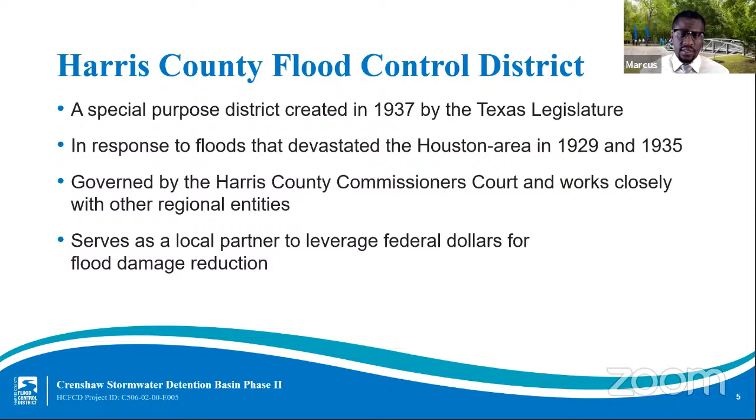The mission of the Harris County Flood Control District is to provide flood damage reduction projects that work with appropriate regard for community and natural values. One of the most difficult challenges we face is constructing effective projects that are sensitive to community and natural values in a highly urbanized area.

Harris County includes 22 main watersheds, totaling approximately 1,800 square miles and more than 2,500 linear miles of channel. 2,500 miles is approximately the distance from New York to California. A watershed is a geographical region of land that drains to a common channel or outlet. Each watershed has its own unique characteristics and needs. The project we're presenting tonight is in the Sims Bayou watershed, located in southern Harris County.

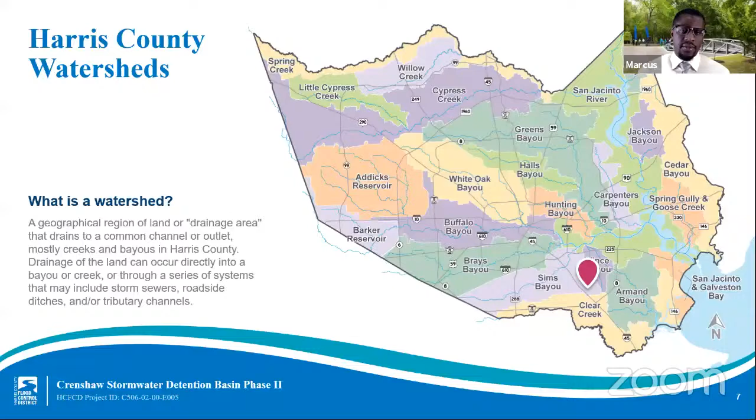Our area is flood prone, and here are some reasons why. We experience extreme rainfall, including tropical storms and hurricanes. We have flat, slow draining land, and we also have clay soils that do not soak up excess rainfall quickly.

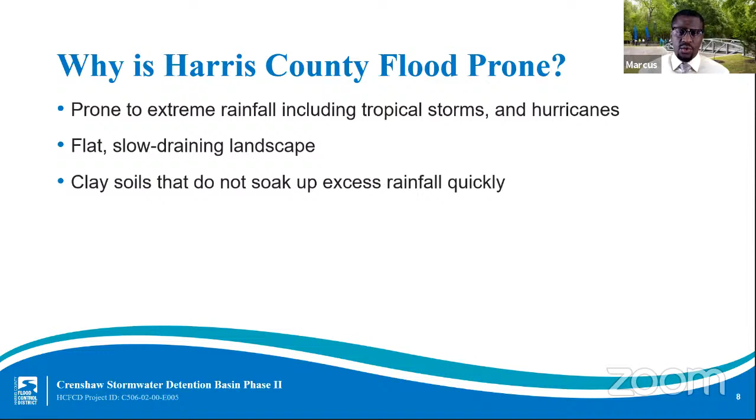While the Flood Control District plays a critical role in flood risk reduction, we are one of several entities involved in these efforts in our region. When rain falls on your roof, it flows through several jurisdictions such as streets and drains managed by Harris County Engineering Department, a municipal utility district, or cities such as the City of Houston, before it flows into a larger channel, creek, or bayou that the Flood Control District owns or maintains.

When storm sewers are increased, this creates an increase in runoff. Since it is our policy to avoid impacts to property downstream, detention basins have to safely take in and temporarily store excess stormwater during heavy rain events. Often, we partner with Harris County precincts, utility districts, and others to add recreational amenities such as trails to these basins and along our channels.

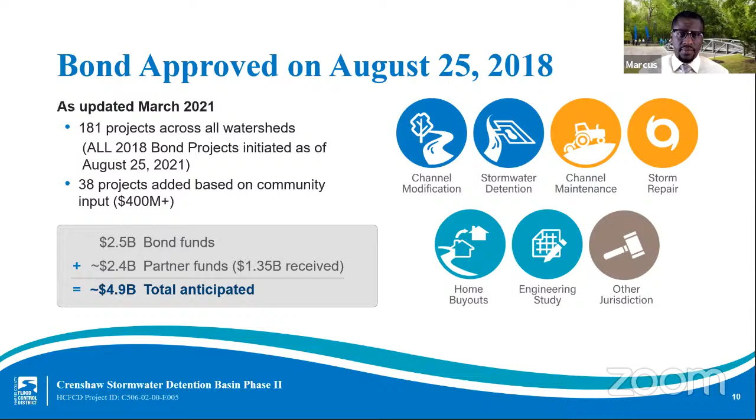While the bond was for $2.5 billion, the full cost of every project in the bond table is almost $5 billion. So we made it clear from the outset that we would need funding partners to fully construct the projects in the bond program. As I've mentioned, we've had some success so far, having secured more than $1.35 billion in partner funds. This graphic illustrates the many sources of those partnerships, including federal, state, and local funding that the Flood Control District is working to secure for Harris County.

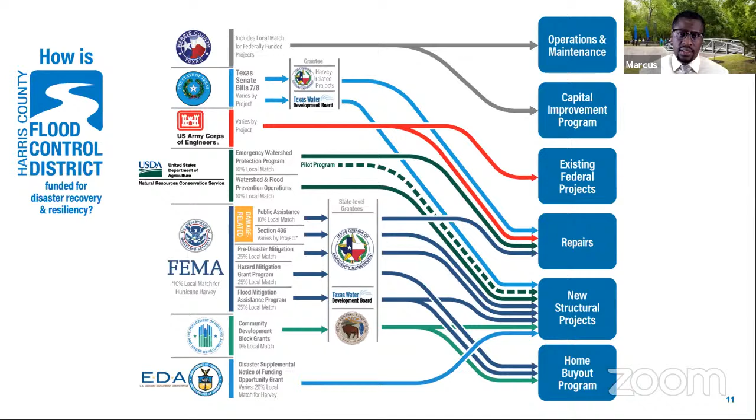Each agency has its own definition of eligible projects and its own requirements for local match funding, so the Flood Control District works diligently to match projects to the right partnership opportunity. We will now move into the part of the program that is specifically about the Sims Bayou watershed and phase 2 of the Crenshaw Stormwater Detention Basin project.

The Crenshaw Stormwater Detention Basin is located within the city of Houston, east of the intersection of Galveston Road and south of Shaver Road. The purpose of the proposed detention basin is to provide additional stormwater storage for channel C506-02-00-E005-Crenshaw. This project is an extension of an already existing stormwater detention basin in the area and will add additional flood mitigation for the Arlington Heights subdivision.

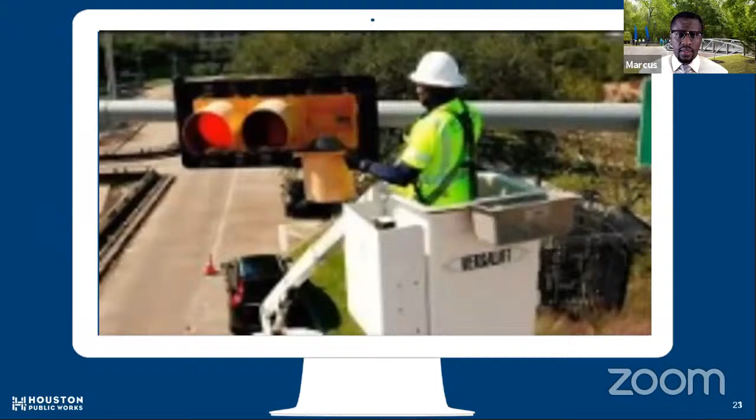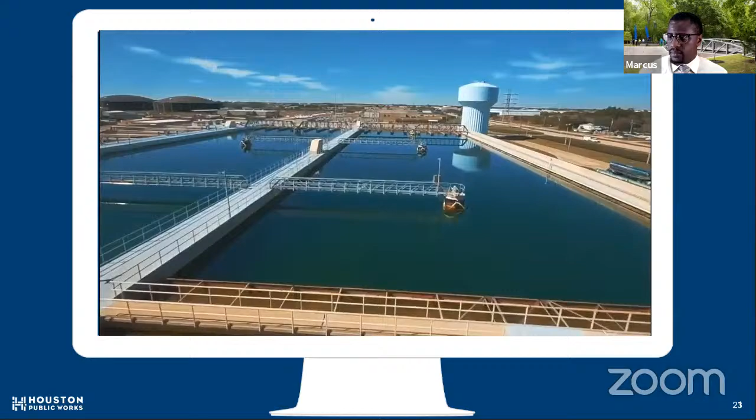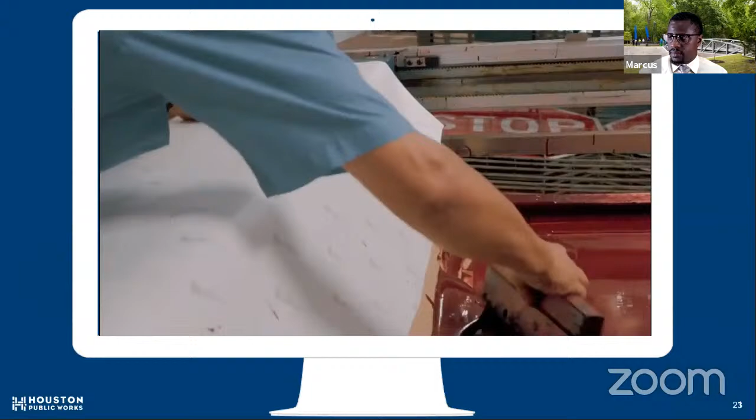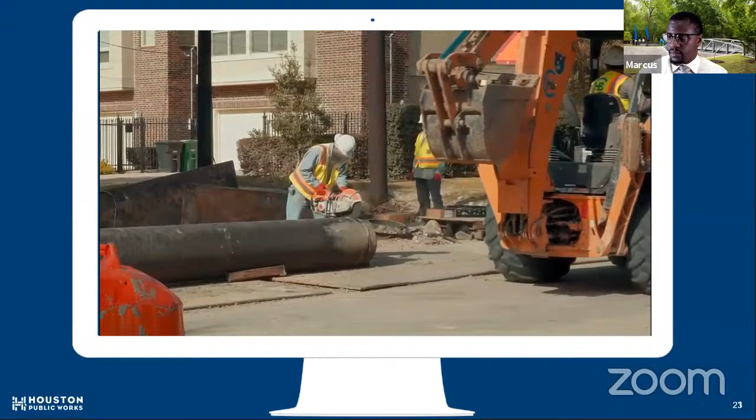Houston Public Works is responsible for the daily tasks you may take for granted. You may not notice us, but we work around the clock to support you. We are the foundation for life in Houston. Houston Water distributes enough fresh water to fill the Astrodome 4 times a day. Transportation and drainage operations handle 16,000 miles of streets, over 1 million signs and street names, and thousands of drains. The Houston Permitting Center regulates hundreds of projects so you can work, play, and live safely. Customer Account Services ensures 2.1 million people have access to safe drinking water with efficiency, accuracy, and flexibility. Capital Projects manages the critical improvements that make Houston better every single day. Houston is always moving towards growth, innovation, and progress. We are the largest, most diverse public works organization in the country. We are one team with one purpose. Together, we create a strong foundation for Houston to thrive.

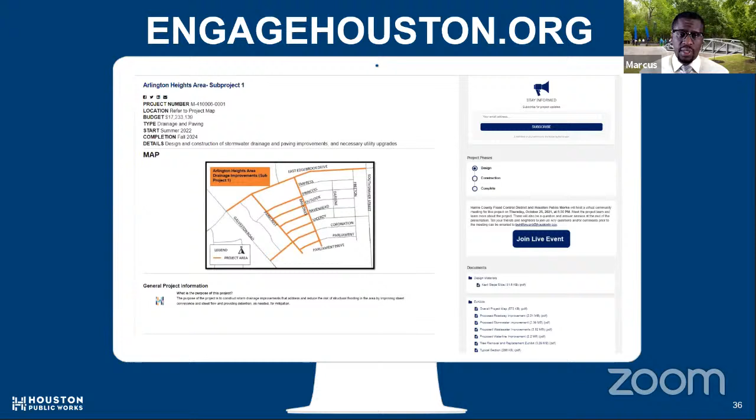The city is nearing completion of the design phase for Subproject 1. The construction phase will begin in spring of 2023 and will be completed in 2025. The design phase for Subproject 2 will be in 2023, and the construction phase will begin in 2025.

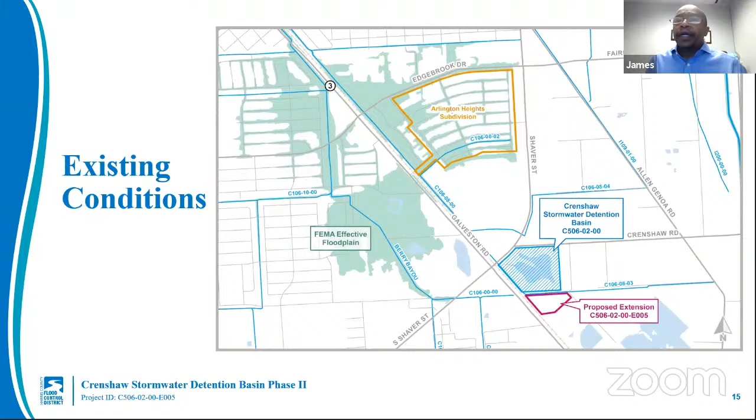Thank you, Sparkle. Like we said earlier, this Arlington Heights project basically has two sub-projects, sub-project 1 and sub-project 2. Sub-project 1 will need to be completed before we can start working on sub-project 2. Sub-project 1 is expected to start construction in the spring of 2023, and it should take about 2 years, so that means it goes all the way to spring of 2025. We'll then have sub-project 2, which begins in the fall of 2025, and that should also more or less take about 2 years to complete.

Thank you. All right, thank you. Sherry, this next question is for you, and it's one that we get often: how is this project funded?

Thank you, Sparkle. This project is funded through the city's capital improvement program. The funding sources include drainage fee, Combined Utility System for water and wastewater improvements, and property tax.

All right, thank you. James, the next question is for you: will there be any road closures or traffic impacts during construction?

Thank you once again, Sparkle. Yes, we do expect that there are going to be road closures as we work on the project. However, the project is set into phases. So what's going to happen is the City of Houston has a traffic control plan in place, and any person who gets affected during construction will be informed prior to the construction taking place. With this plan in place, we'll ensure that traffic continues the best we can, and that there's minimal impact to your commute. Thank you.

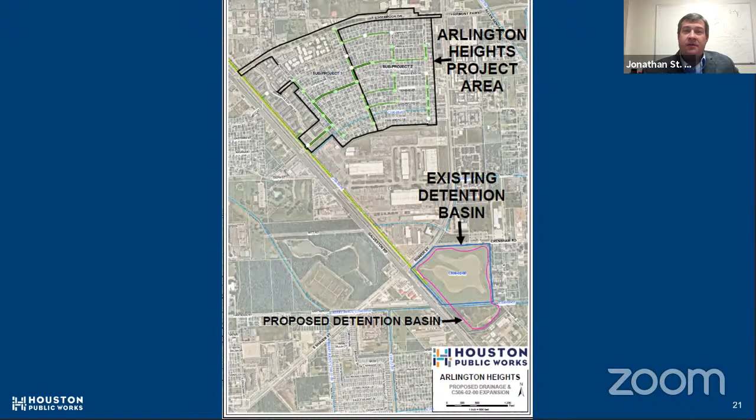I'm going to pass that question to Jonathan St. Romain. Thanks. So this basin does not technically work with the South Shaver Basin in terms of they don't have to be built at the same time or together. They do happen to be close by and are in similar locations within the watershed. And so they do help flood mitigation in similar areas. And so in that regard, they will help to reduce flood risk in the nearby streets and neighborhoods, but no, they are technically not related to each other or part of the same project.

All right, thank you. Marcus, will you take this next question? What will the project accomplish? So the project will accomplish two things. One is increasing the conveyance within the internal system of the neighborhood, which is the Arlington Heights subdivision drainage improvement project. The second thing it will do is mitigate any impacts related to that increase in storm sewers by extending the existing detention basin at C506-02 to provide additional volume for that additional flow that we expect to be introduced into the channel with the increasing of the storm sewers.

All right, Emmanuel, our next question is for you. What stage is this project? Again, thank you, Sparkle. The Crenshaw Stormwater Detention Basin project is currently in the final design stage. This stage is expected to be completed in fall of 2021, and the construction process is anticipated to start in spring of 2022. And the Arlington Heights project is currently in design, and bids will go out next year, and the contractor will be selected. Once a contractor is on board, the City of Houston will schedule a virtual community meeting to discuss how to prepare for construction. And the construction is to be completed in 2024.

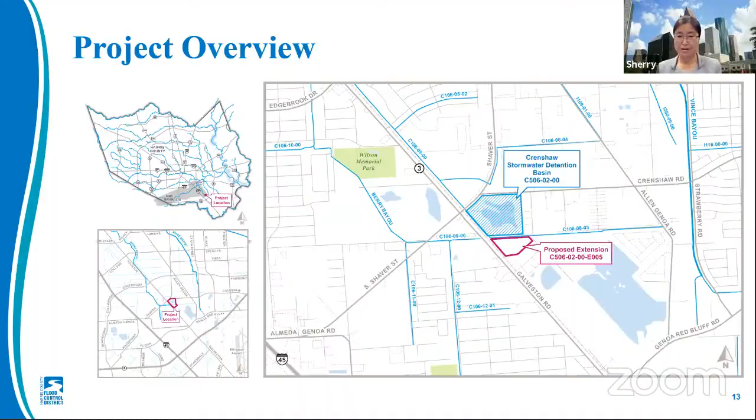All right, thank you. Sherry, will you take our next question? It is, with closures in Arlington Heights, will there always be accessibility to and from our homes in a safe manner? Yes, Sparkle, thank you. The short answer to that question is yes. Our contractor will make sure the homeowner or anybody visiting the home will have accessibility to and from the home at any time. There will be a short time when you may not be able to park your car on your driveway while they're working on your driveway portion within the city right-of-way. That will be temporary. And during that time, we will work with you and your neighbor and see whether you could park your car on a nearby street.

All right, Jonathan, we have a question on traffic coordination. Will there be traffic coordination with the local schools like Yes Prep? Sure, yeah, we will coordinate that as much as possible. I don't know exactly where Yes Prep is, so I can't speak specifically on that spot, but in general, we do coordinate when we have these big construction projects that obviously put a lot of heavy construction traffic and dump trucks out on the streets. We do coordinate that with the surrounding areas. And I know sometimes our questions can get very specific to our neighborhood or our community or our specific home.

For those questions that in this format we aren't able to answer in detail, I do want to remind everyone that we will be following up following the public comment period. You'll receive a response from the Flood Control District and or City of Houston Public Works. So we do want to make sure we answer all of your questions. With that, I'll take the next question, and it's for James.

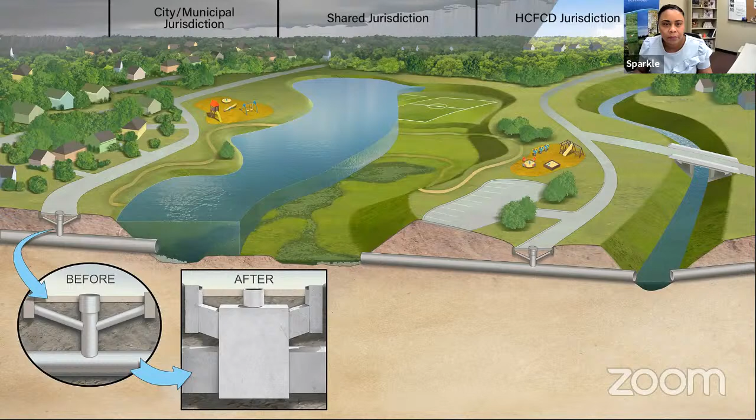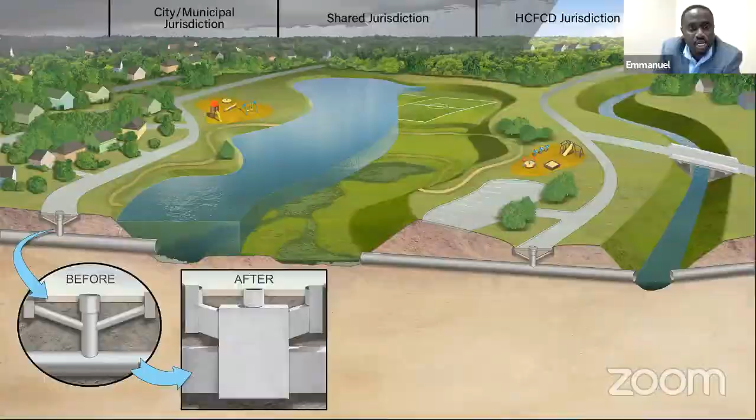All right, thank you, Emmanuel. The next question is, why are there multiple phases to this project? Thank you, Sparkle. For the Crenshaw Stormwater Detention Basin, the second phase was added due to the availability of an additional tract of land that could be used to mitigate the drainage improvements at Arlington Heights. Now, city representatives will address the phasing of their subdivision project.

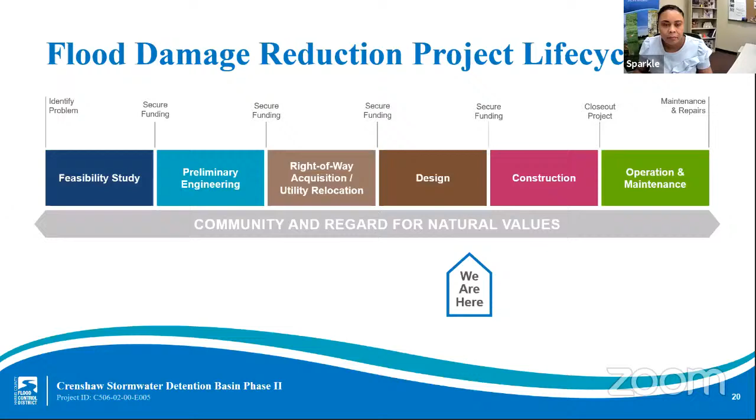All right, thank you. Marcus, here's another question. If you are improving flooding in this area, are you just flooding another area as a result? Yes, and that's again another good question. But the answer is very similar to one that I've mentioned a couple of times prior to now. Our policy, the policy of the Flood Control District, is to not transfer risk or cause downstream impacts. It's something that we hold developments to, as well as we hold ourselves and our other partners within the greater Houston area to. So there are engineering analyses that take place where we have to, one, prove to ourselves and have others prove to us that the project that is being constructed doesn't transfer a flooding risk to another area.

And specifically as it relates to this project, the way it works, this detention basin is downstream of where the improvements are happening. But what it's doing is it's taking flow off the channel prior to going downstream, such to allow the City of Houston to be able to increase the size of their storm sewers to get the water out faster. So the elevation in what we call an existing condition versus the proposed is actually lowered upstream below the top of banks so that additional flow can be added in further upstream.

Marcus, do you mind if I tag along a little bit to that one? Yes. And Sparkle, do you mind going back to that overall regional view, please, with all the projects?

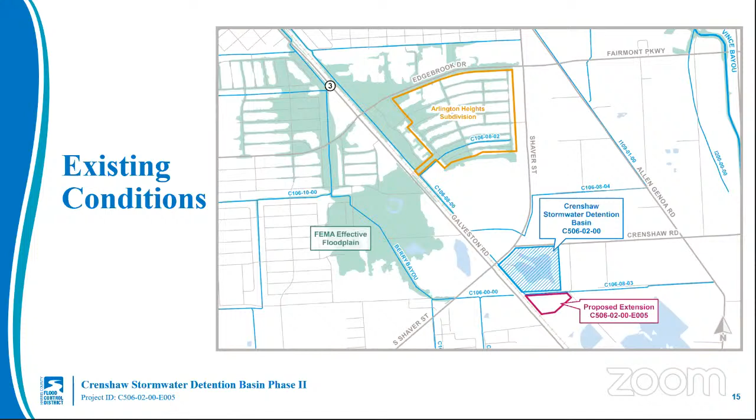Our next question I'll take, and it's how can I learn more about the projects going on in Sims Bayou Watershed? We have a wealth of information out on our website, and I will never miss an opportunity to encourage individuals to log on to hcfcd.org and find out more about their watershed of interest. If you're interested specifically in Sims, please do log on to hcfcd.org/Sims. We encourage you to check it out. We are constantly updating the website.

This next question is for Emmanuel, and it is Shayla. Shayla asked, what are your plans for the Crenshaw Detention Basin? All right, I'll pass that on to Jonathan. Sure. So all right, I'll turn myself on here. Our plans for the Crenshaw Detention Basin are to expand what you see out there today. And so if we can look at the map that shows what's existing, there we go.

So the polygon, the shape you see down there on the south outlined in purple, is our proposed extension of the stormwater detention basin, and everything to the north is what exists there today. And so that shape that's highlighted in purple really represents the parcel, the tract of land that the flood control district has purchased. And so what you will see when this goes to construction is lots and lots of excavation

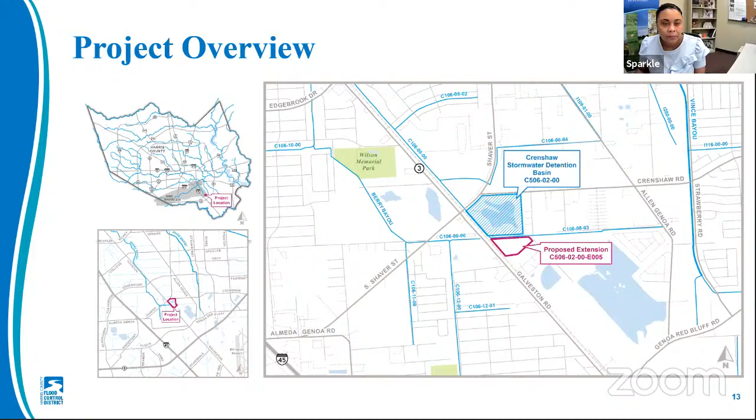All right, so the project overview here, we're looking at two projects. One project, Harris County Flood Control District is leading, and the other project, the City of Houston is leading. The Flood Control District's project is to expand an existing detention basin to provide some extra detention volume. Next slide, please.

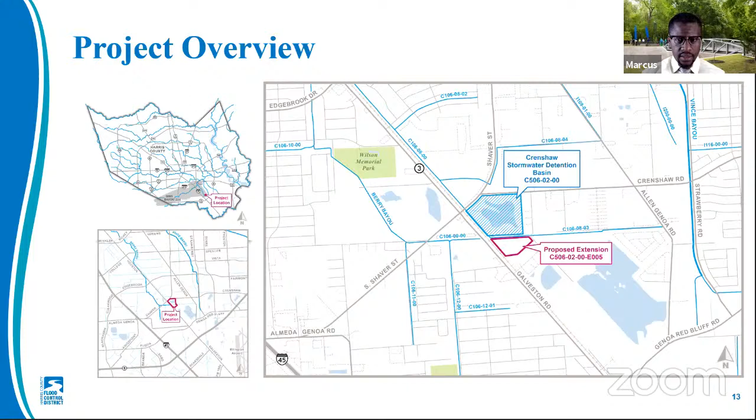So our current timeline for the project, we're currently in the design phase. We plan on wrapping this up fall or winter of 2021, 2022. And then in winter of 2021, we plan to go into bid and start the construction process in the spring of 2022.

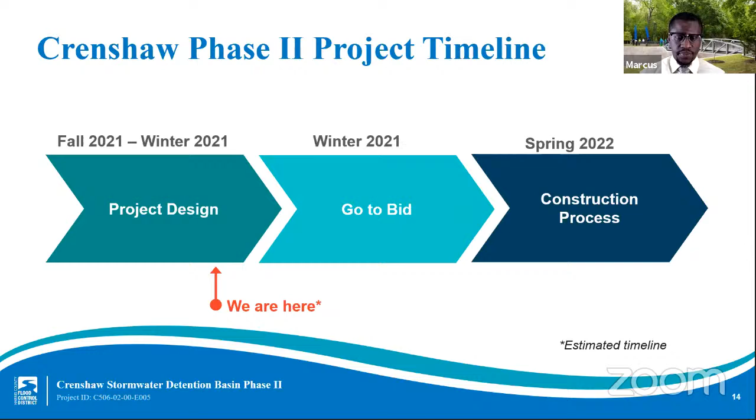So the existing conditions of today, we're showing here what you see in the teal color, which I think I may have said blue last time, is the actual FEMA effective floodplain for C106. You'll notice some of the green areas going into the subdivision, and that just represents the riverine flooding. The actual depths of inundation typically experienced by the neighborhood are probably more than this, just because it was an internal system issue that needed to be developed as well. And to the south of that, you see where we plan on extending the existing detention basin C506-02.

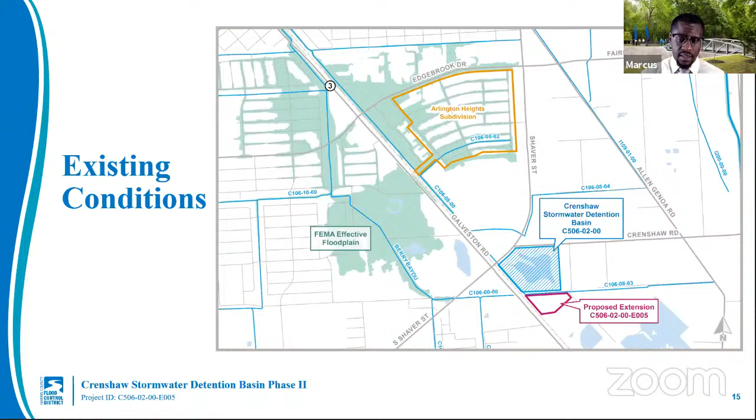So this exhibit is meant to show how that detention basin functions. Soil is excavated on what I previously said as natural ground. So this would be the area where you see here where it says detention storage. If you would imagine, all of this is just full of soil or dirt. We excavate that out so that water from channel C106-08 can flow into the basin in major storm events, and during normal events, it'll just capture runoff from areas that are around it.

So once C106-08-00 becomes full, the detention outlet that's shown here on this exhibit holds it in and allows that water to slowly go back into the channel as the channel water starts to recede. Because once the elevation in the channel is higher than the basin or they're the same, then that water is held until there's enough difference in the elevation between what's labeled as detention storage and what's labeled as channel to allow that water to go out slower after the storm has passed.

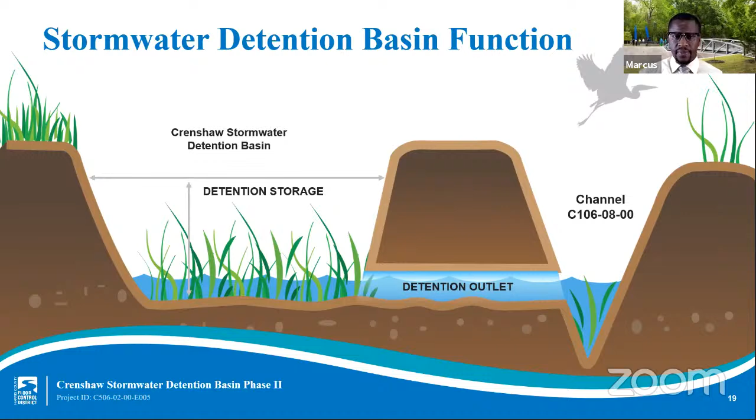And this exhibit just shows what I just described here, with the water starting to come out of the detention outlet once the elevation in the channel has receded. And so again, as I mentioned, we are currently in the design stage and plan on having that wrapped up in winter of this year and move into construction by spring of next year.

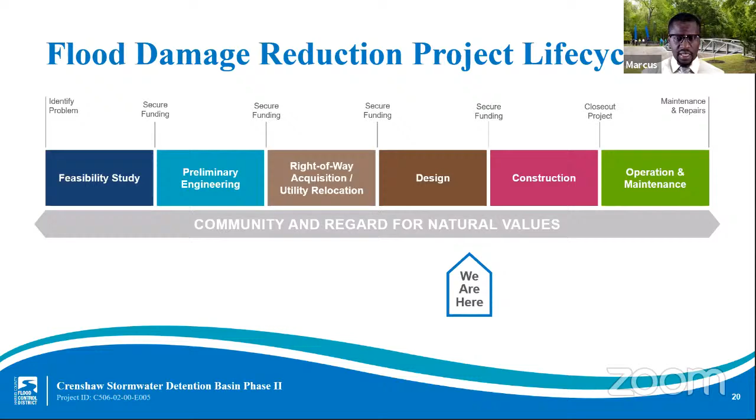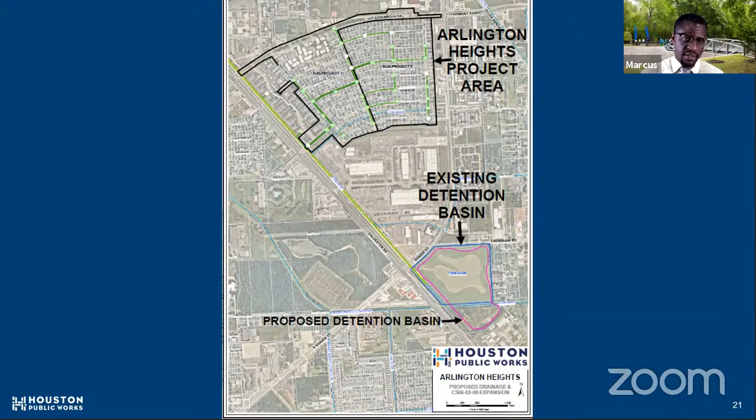And I don't think we need to play the video again. There we go. Thank you.

So the area to the west, in the west part of the subdivision, is sub-project 1. The area to the right in green is sub-project 2. The city plans to construct sub-project 1 first, and that will be followed by sub-project 2.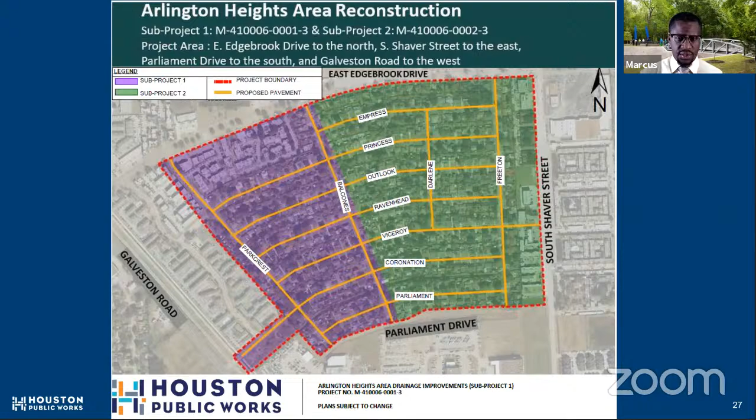Marcus, you're muted. Sorry, did I accidentally mute myself? Sorry. I think so. Okay.

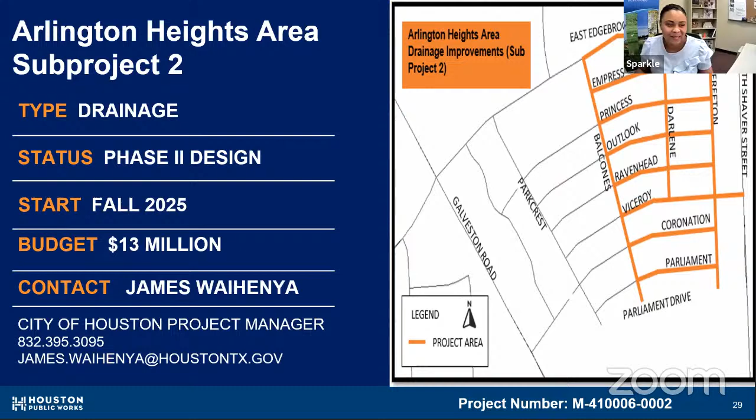Sub-project 2 is also a drainage project. It is currently in phase 2 of design with construction start in 2025 and a budget of $13 million. And James Waihenya is also the project manager for this project.

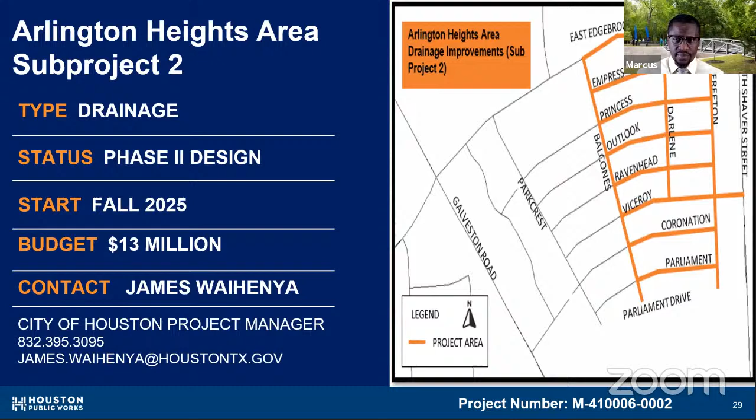So the City of Houston has several improvements that they're planning on doing. Some of those improvements include the storm drainage system, reconstruction with 5-foot sidewalks and 4-foot buffers, addition of new street lights and water line replacements per city standards, along with sanitary sewer replacements also per city standards.

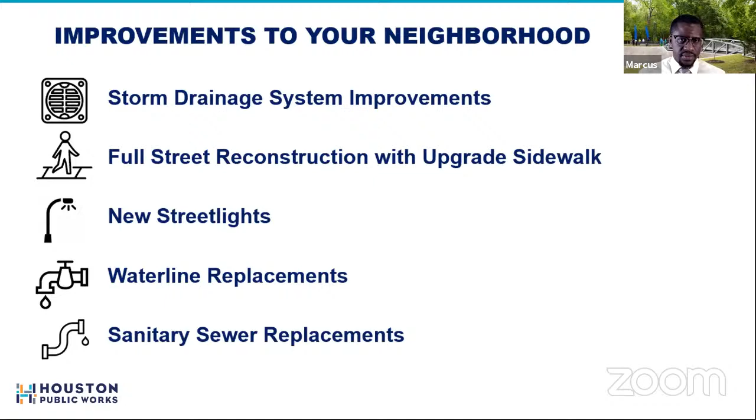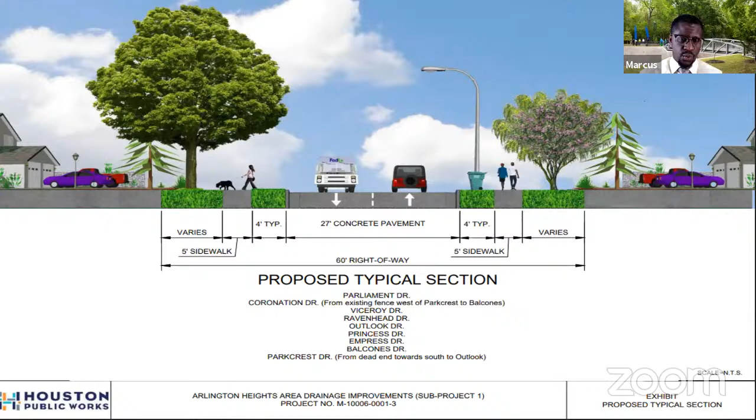Here we have the remaining portion of sub-project 1 with the same 5-foot sidewalks, 4-foot buffer within the 60-foot right-of-way, and it includes all of the streets here, which are Parliament, Coronation, Viceroy Drive, Ravenhead, Outlook Drive, Princess Drive, Empress Drive, and Balcones Drive, and Parkcrest Drive from the dead end towards the south towards Outlook.

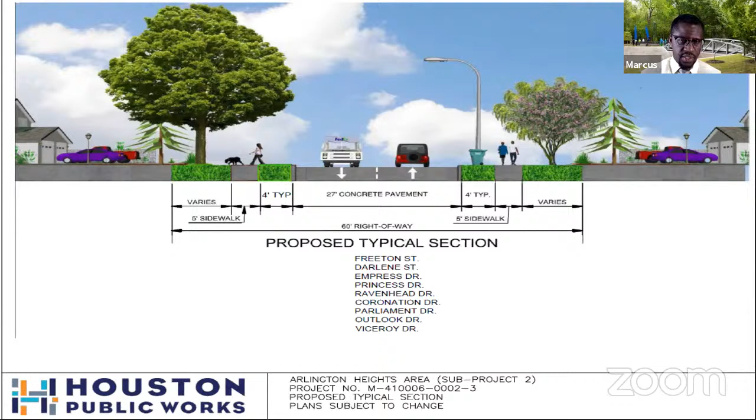And here is sub-project 2 with pretty much the same configuration except within a 60-foot right-of-way. So 27-foot concrete pavement, 4-foot buffer, along with 5-foot sidewalks. And the list of projects that use this typical section are shown here on this exhibit.

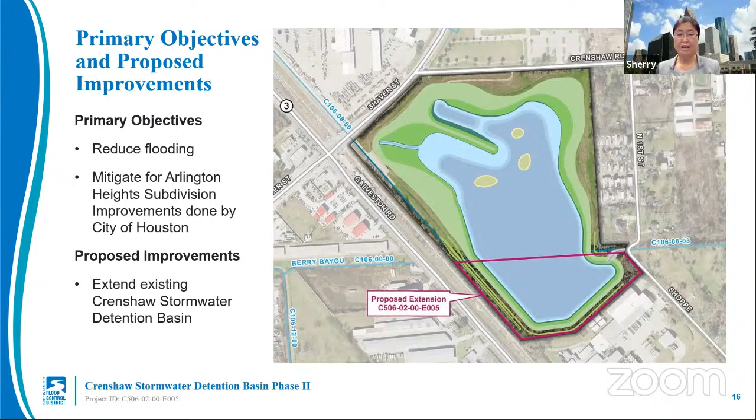Hope that helps. All right, and Sherry, one more question for you. How will we be notified before the neighborhood construction starts? It's a great question. About a month before construction starts, we will come out again to do another public engagement meeting with the neighborhood. And during that meeting, we will also have our contractor on board, and we will talk about what you can expect during the construction, and we will prepare you for the construction.

All right, and with that, I'd like to share one final reminder that we are continuing to accept comments and feedback on this project through November 12th, 2021. We also encourage everyone to get flood insurance as flood season in Harris County runs year-round.